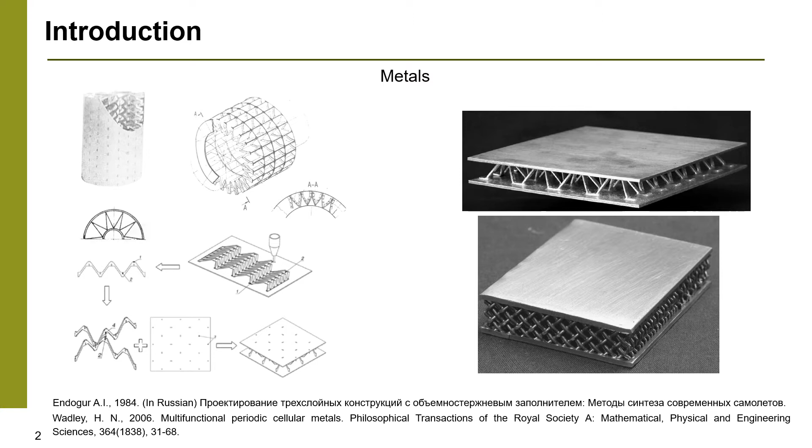For the strength analysis, analytical prediction of buckling load of the lattices were provided. In addition, from mechanical testing, it was observed that there is debonding between outer shells and the core due to poor solder joint properties.

It is possible to produce lattice from fiber-reinforced composites. The examples of anisogrid lattices are used for structures where there's no need for skin, as shown for fairing of space rocket and for drone structure.

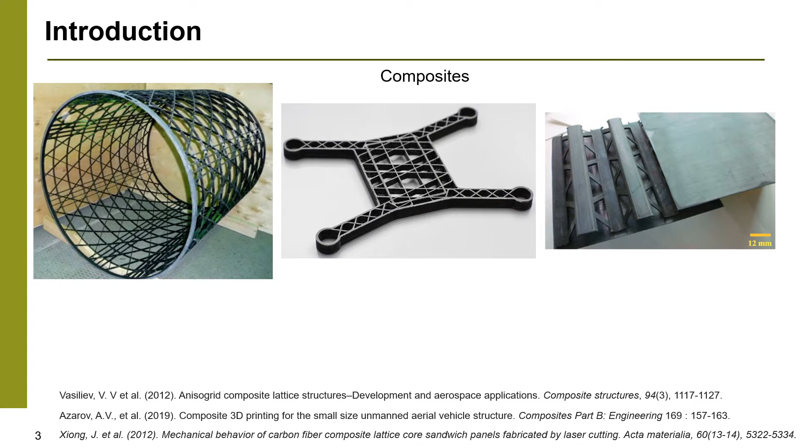It is also possible to manufacture composite panels, as shown on the slide. Thermoplastic composites are useful for this purpose since they allow forming process. However, according to the reports, failure modes associated with buckling and failure in zones between the lattice and the skin frequently occur. The lattice structures are very promising due to high mechanical characteristics, but at the same time they are

still not very widely used in industry due to problematic manufacturing, control of defects, and difficulties for the computational analysis.

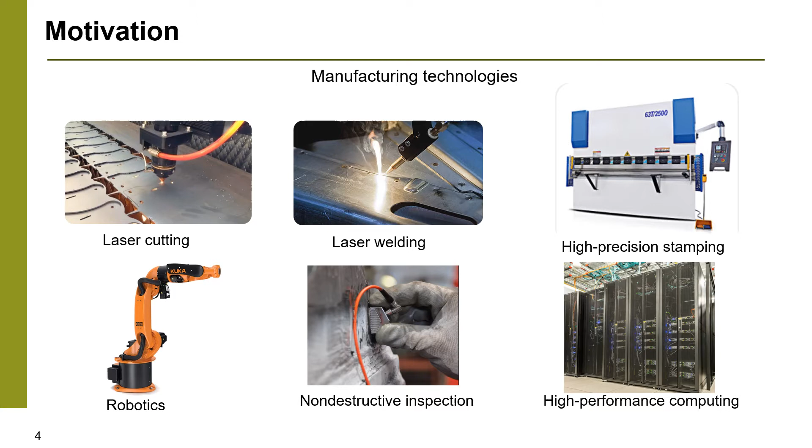Our motivation is that thanks to modern manufacturing technologies such as laser cutting and welding, high precision stamping, it is easy to produce such structures. And in support, robotics and non-destructive inspection make it possible to control defects. The final point is that high performance computing allows the analysis of such lattices on the level of every reinforcement rib, every reinforcement bar.

Trying to find an optimal core structure, we directly use a topology optimization procedure. Elastic compliance is an objective function which is supposed to be minimized.

The initial topology is a rectangular plate, and two load cases are considered for the analysis. The target mass is 10% in comparison with the initial plate mass, and outer surfaces are frozen, so no optimization in this region.

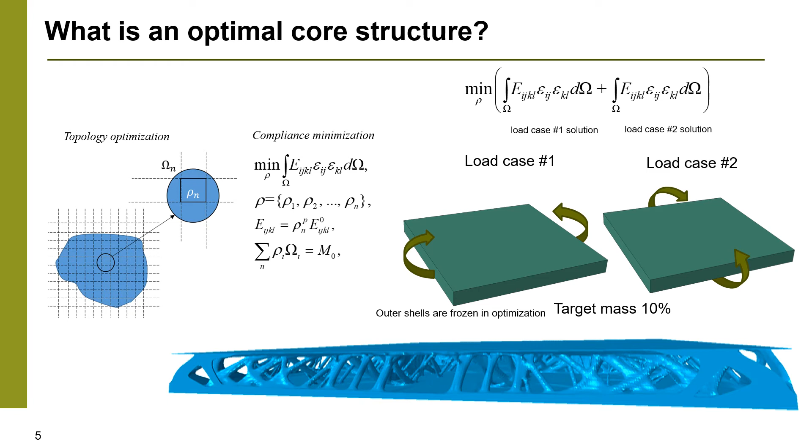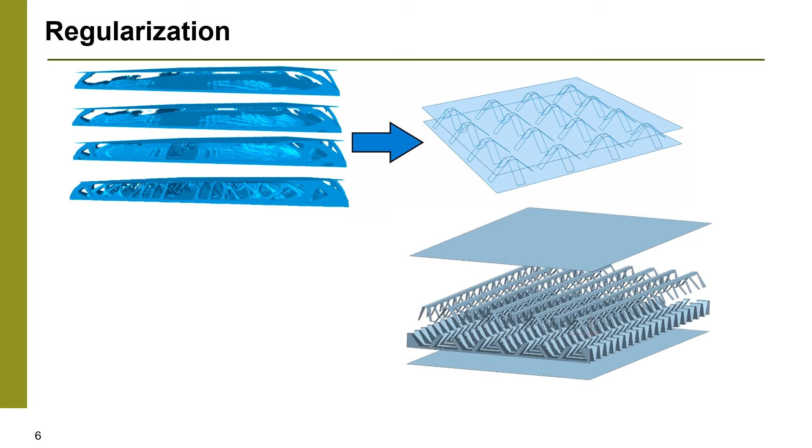The result of optimization is shown on the slide, which is quite a complex shape, consisting of a lot of truss-like elements between outer shells. We can simplify the obtained topology by the pyramidal-like core, which is feasible for manufacturing.

This is the first concept for the construction industry. The idea is to fill the space between outer sheets of our sandwich with concrete, so it allows us to refuse the traditional metallic bar reinforcement and to skip a long process of the frame construction.

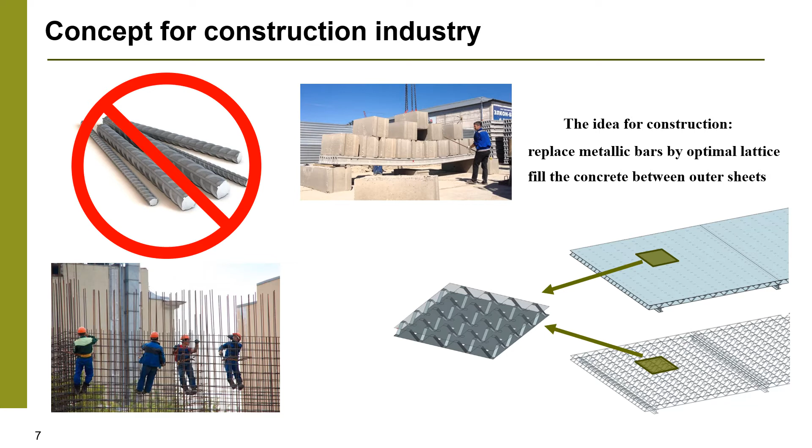For the evaluation of the proposed structure, we compare it with a traditional concrete plate reinforced by metallic bars. We simulate the response to the bending load, and the scheme of the finite element model is presented on the slide.

We use a special modeling technique of Abaqus software, called embedded element, which allows us to use beam elements for bars embedded into the solid elements for the concrete media representation.

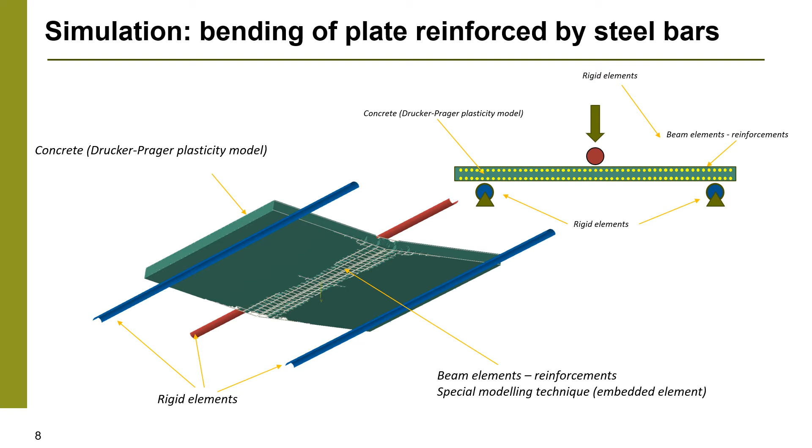Drucker-Prager plasticity model is used for the model, and in addition a failure criterion is applied, so the structure is loaded up to failure. For the metallic components we use classic plasticity, and Drucker-Prager plasticity is used for concrete. It allows us to consider the differences of yield strengths for tension and compression, and the Kolmogorov failure criterion was chosen to consider equivalent plastic strain accumulation.

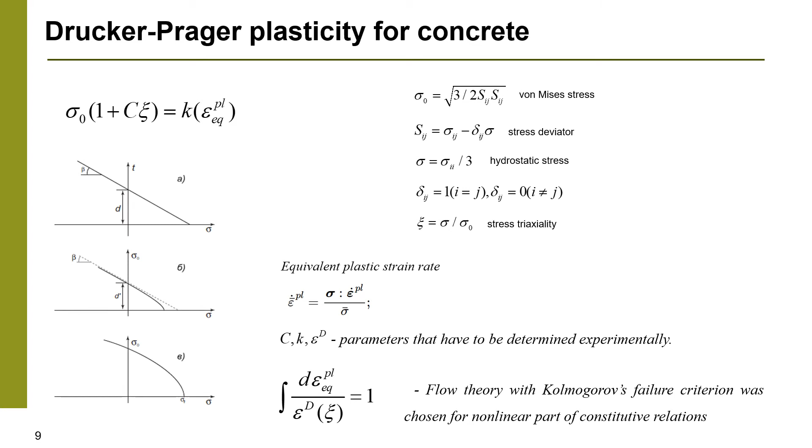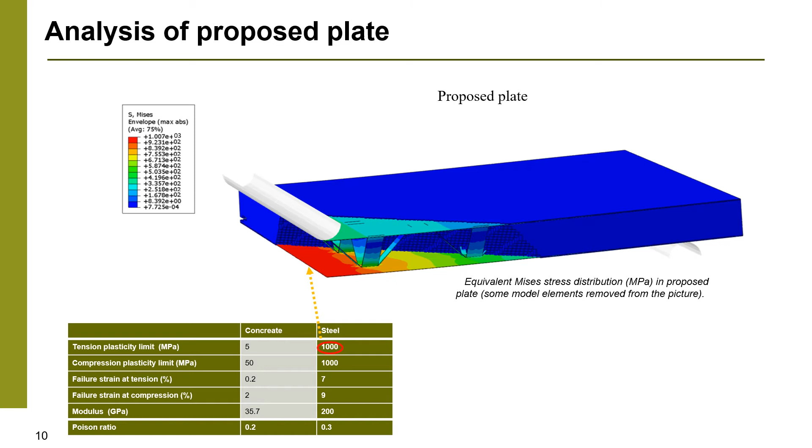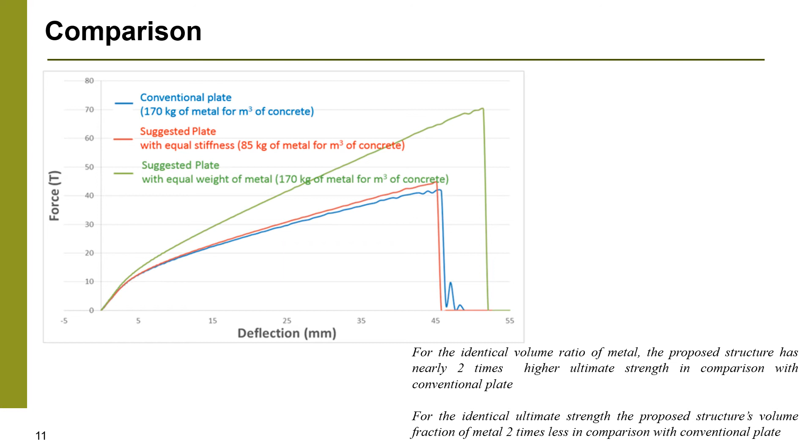Comparing force versus deflection diagrams for the two plates of the same external dimensions, we can conclude that for the identical volume ratio of metal, the proposed structure has nearly 2 times higher ultimate strength in comparison with the conventional plate. If we would like to achieve the same ultimate strength, we need a volume fraction 2 times less for the proposed plate compared to the conventional one.

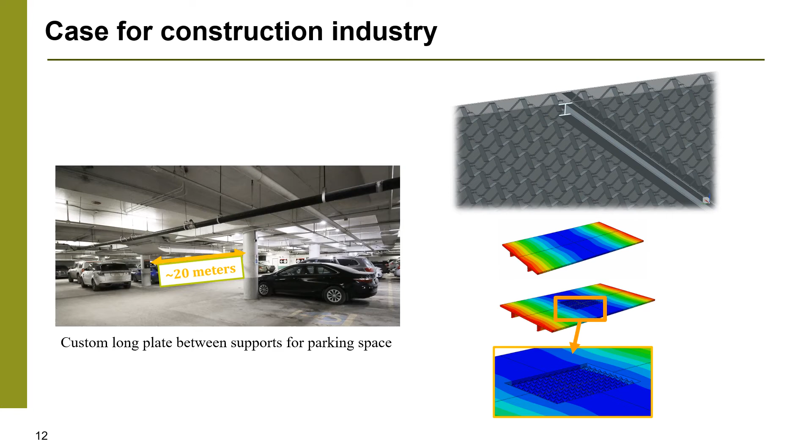In construction, typically a fixed assortment of plates is available, and this is a demonstration where we need a plate of extra length. So the proposed structure looks very effective due to the enhanced stiffness.

In the second case I want to present, this is a proposed structure of a pressure bulkhead. This is the rear part of the fuselage. As previously, it consists of two skins and the lattice between them, as shown on the slide. The diameter of the pressure bulkhead is 3 meters, and the characteristic length of the rib between shells is 90.7 millimeters.

So one of the most important critical requirements is damage tolerance. The statement is it should sustain 0.65 bar pressure with a crack length from 800 to 1000 millimeters, and aluminum material is assumed.

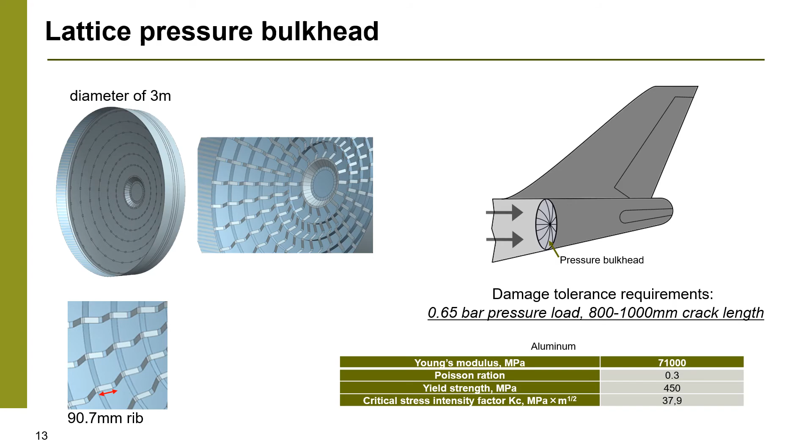The finite element model was developed for the analysis of the pressure bulkhead using shell elements, and again we compare the classical structure and the proposed one with the same masses. Fixed nodes for boundary conditions are highlighted on the slide, and the pressure is applied on the internal surface.

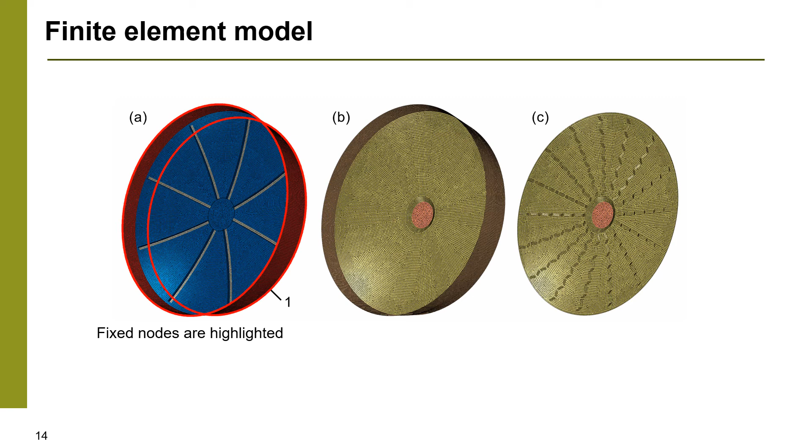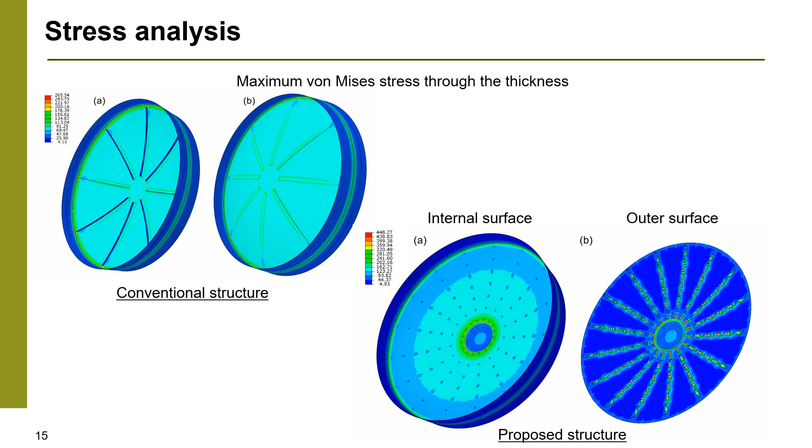On this slide, there is a comparison of maximum von Mises stress through the thickness for both structures, assuming no crack presence. For both structures, maximum stress is below the yield limits. However, for the proposed structure, there is no benefit since there are a lot of stress concentrators between the ribs and the internal and outer skins.

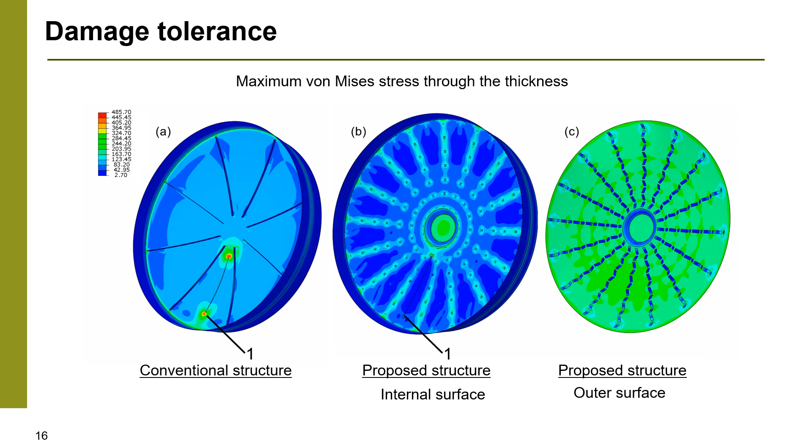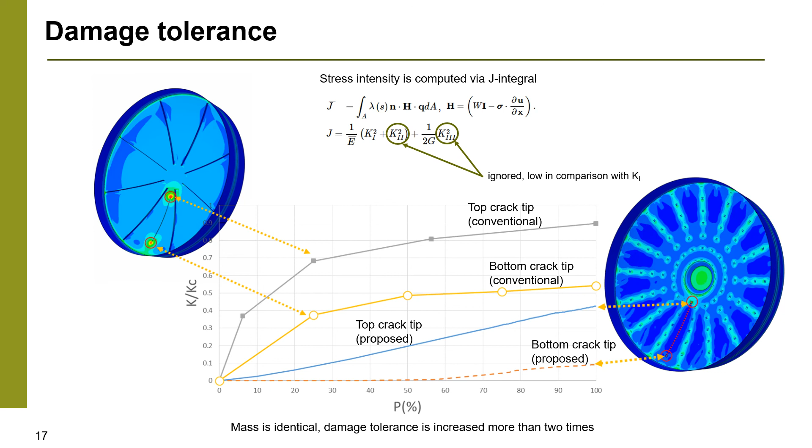And the conclusion is that the lattice structure core is close to the optimal one, as we verified using a simple topology optimization analysis problem. From the literature review, we can conclude that many concepts were proposed, but not so much implemented up to today. However, modern technologies allow us to solve many problems revealed in early studies.